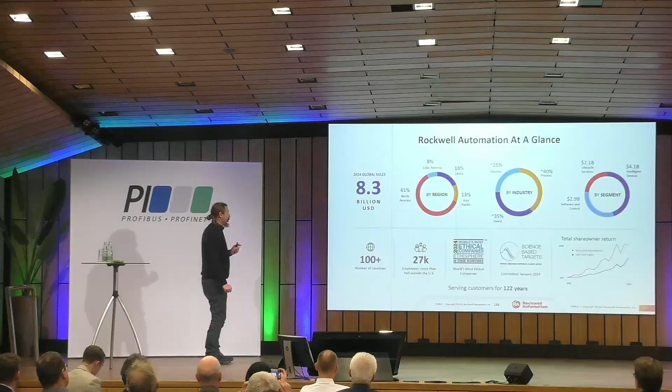This is the agenda for my presentation. I'll try to keep it as short as possible. Let's start by giving some information about Rockwell Automation. We are an $8 billion company. We are present more or less everywhere in the world. Of course, our home garden is North America, where we lead the market.

Okay, we are a successful startup. We started in 1903, and I can say we made it. So my message to the startup guys here is go on. Maybe you will find a company that will last more than 100 years like Rockwell Automation. We started in 1903 with nothing to do with industrial automation. It came step by step. I'd like to mention a couple of important dates.

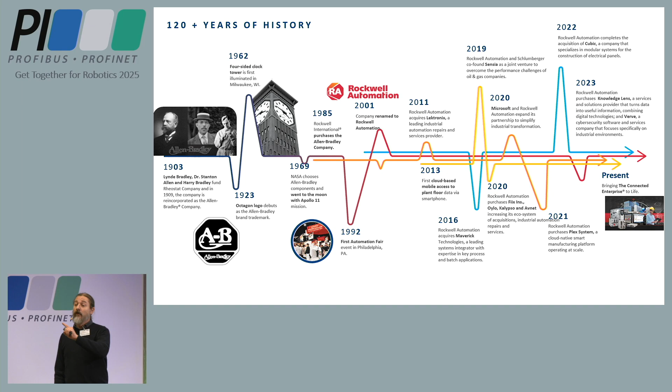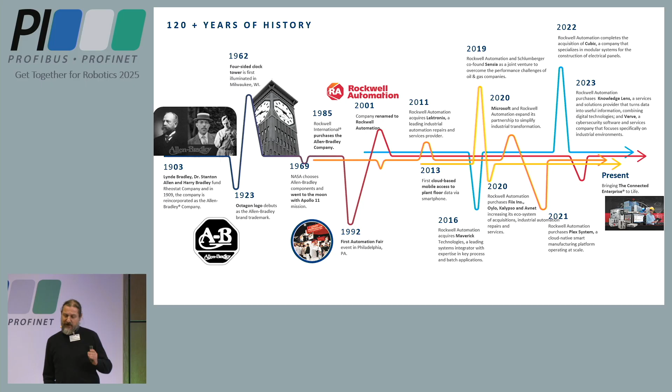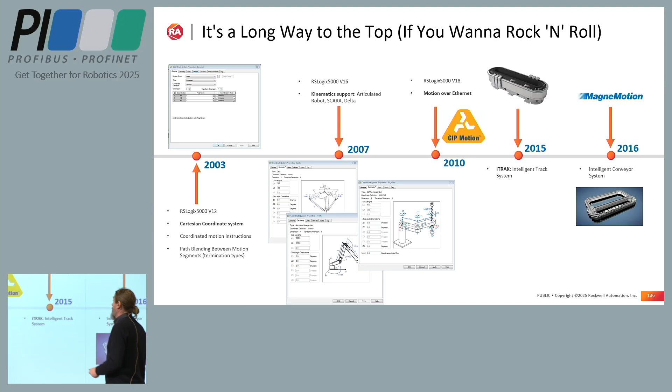Okay, let's have a quick look at the past, talking about integration of robotics or coordinate systems or multi-axis systems, let's call it as you want. We started in 2003 with the first coordinate system, so the capability of grouping axes together. Then kinematics followed, so that we could link different types of geometry to the multi-axis coordinate system.

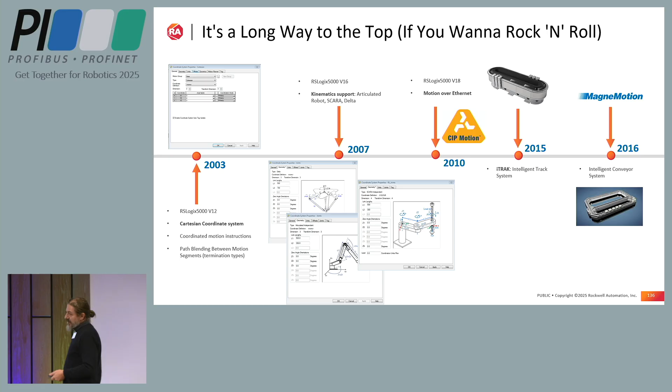In 2010, we introduced motion over Ethernet. Before we had analog cards and then SERCOS, and then in 2010 we moved to the ODVA Ethernet technology. I'm also naming the independent cart technology because it will come back later in the presentation, even though it's not related to robotics, but they share common ground.

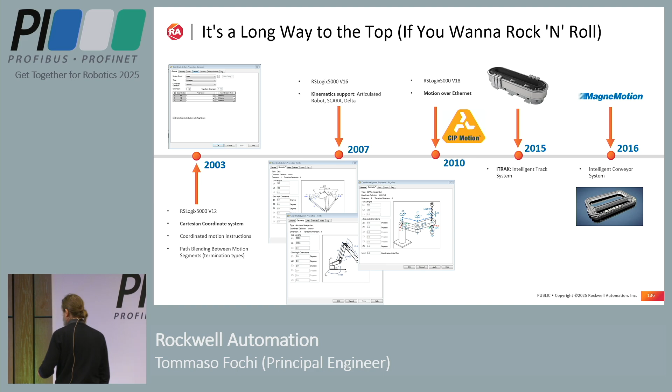So in 2015, we introduced the iTRAK, and in 2016 we bought MagneMotion, a Boston-based company that still makes intelligent conveyor systems. In 2018, we introduced the Application Code Manager, our tool to store or generate libraries, which we'll see come back later in the presentation. In 2019, we announced our offering of kinematics, getting up to 6-axis linear interpolation.

In 2019, we acquired Emulate 3D, a digital simulation software. We'll come back to that later in the presentation. In 2022, we introduced the first release of the robot libraries, which we're going to talk about quickly. And in 2023, we acquired ClearPath, a manufacturer of AMRs. So this is the latest addition to our portfolio.

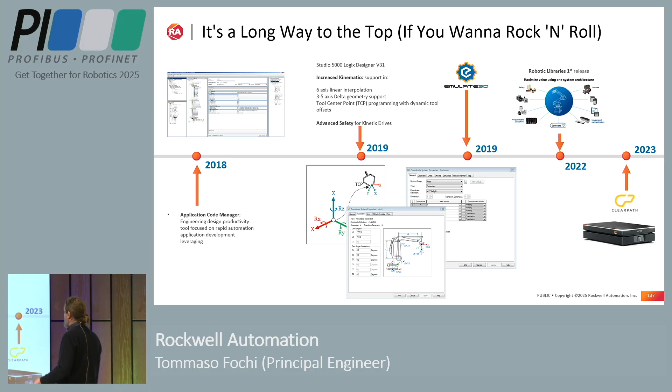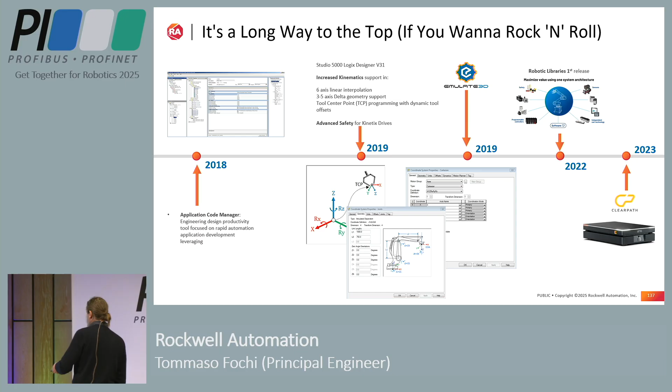We are not a robot manufacturer, so we don't manufacture any robotic arm, but we try to give our customers the capabilities of driving robotic arms, whether they are industrial models or homemade, because we have customers that just build their own kinematics that fit their needs.

The next chapter is simplifying customer experience and unlocking value with digital tools. This is a copy from a marketing presentation, but don't worry, I'm not going to kill you with marketing stuff. I want to talk a little bit about the state of the art today, and how we try to help our customers and make their life easier through hardware and software convergence. I'm not sure that's the right name, but I think it describes well the fact that the real world, control world, and simulation world are more and more connected, and how valuable this integration is to deploy more robust projects, faster, and more generally to give benefits to a user, creating more advanced, efficient systems and improved functionality.

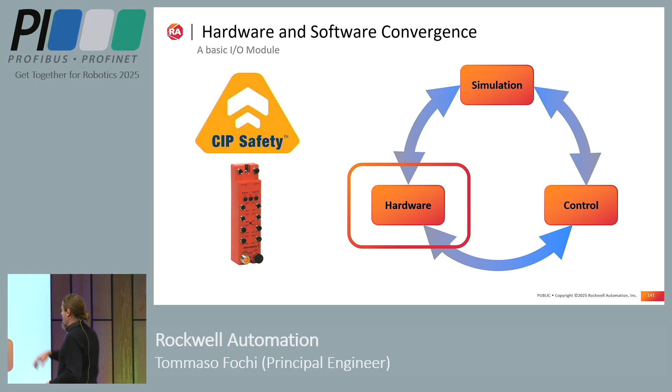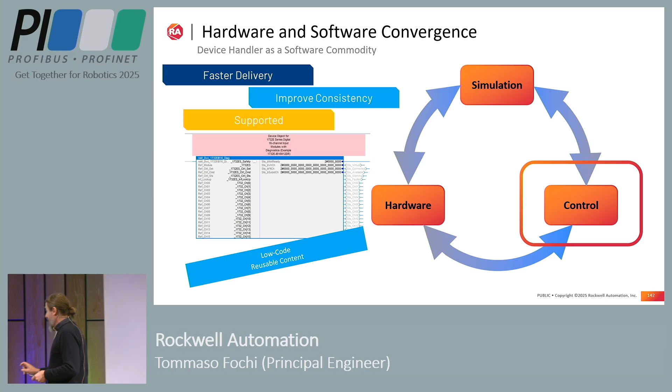What else? So let's start from the beginning. Let's take a simple I/O module, nothing special, 8 safety I/O that runs on a safety network. That's the hardware part, and we provide a software object that is related to the hardware module. So it includes all the functionality of the module, and it's also ready to get connected to the digital twin of it. So you have the hardware component, the control component, and the simulation component. They can run together, or you can have your control connected to the simulation. You can even have an emulation of the control. So possibly you can design and test an automation environment with no other tool than your PC. So you can stay at home, drink a coffee, and program a machine.

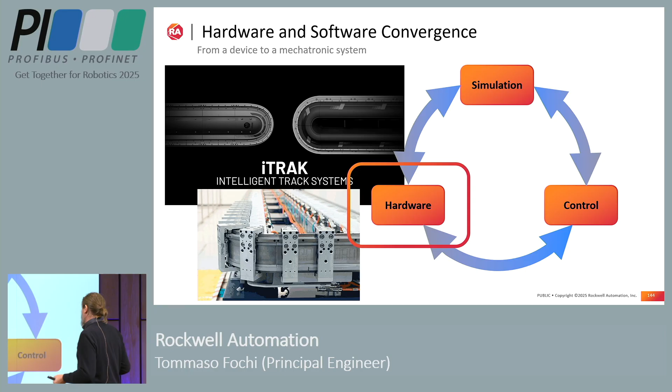Let's go to a more complex system. From a single device, we move to a mechatronic system. In this case, I took the example of an iTRAK. An iTRAK is a mechatronic system, it's modular, you can add pieces. You have some limitation in the shape that you can build, but in general you have certain flexibility, you can have different numbers of movers, so let's say it's a system.

Just like the device that we talked about before, there's a control object that you can grab from the library tool that we just introduced before. And this object, I wrote low-code reusable object because it's already there. You just need to grab it and put it in your code.

Configuring it and not programming it. So we are going in the direction of less programming and more configuration. You configure your system and you deploy the control content into your application, and it brings with it all the subsystems that are managed by the main device handler. So the device handler then manages the other subsystems that belong to the mechatronic system itself, just by grabbing it and putting it into your code.

And of course, it comes with a simulation twin. So you can build your iTRAK using standard reusable components. So now we are talking about objects that are ready to go. You just pick them, put them together, and you are ready to go. So you can use your control with the hardware, you can use your control with the simulation, you can use your control with both. You can virtualize a part of the machine so that some parts move physically, others move virtually, and you can do also the other way around.

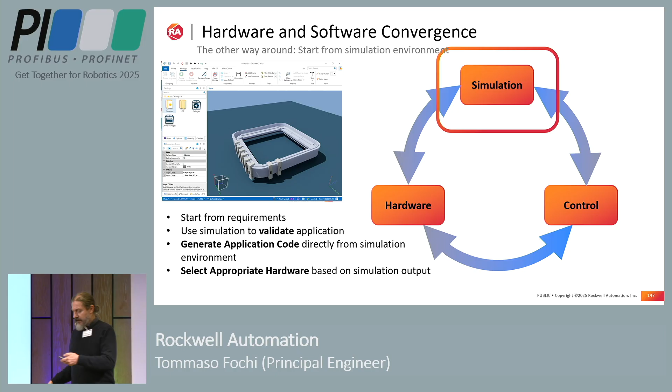Now we move to robot, which is, let's say, the topic of this meeting. And you will see how the concept stays very similar. We have two paths to getting more from your robots. Unified robot control, that means the robot is controlled directly by the Rockwell PLC. It's fun to call it a PLC because automation controllers today are much more than what a programmable logic controller used to be. We also try to give it a different name.

So instead of calling it PLC, we try to call it PAC for a while - programmable automation controller. But this PLC name is in everybody's head, and it stays there. Not a problem. So you can control a robot directly from the system, or you can have what we call Ethernet/IP connected, so drive a robot through the network. Profibus is a great network, but Ethernet/IP is not bad as well.

And let's say, because we are involved in the network connection of industrial robots, of course we are interested in SRCI. So we are joining the working group, and we will participate where we can in the definition and development of the next phases of the SRCI.

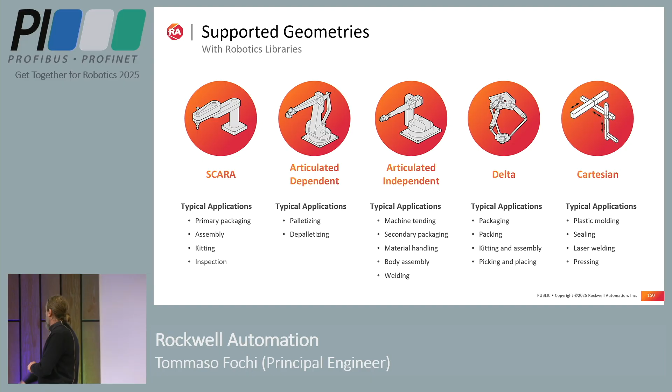These are the supported geometries - I will not bother you with this. These are, let's say, our official partner networks. Some of them provide mechanics that goes directly controlled by the PLC. Others are partners that we can connect through network.

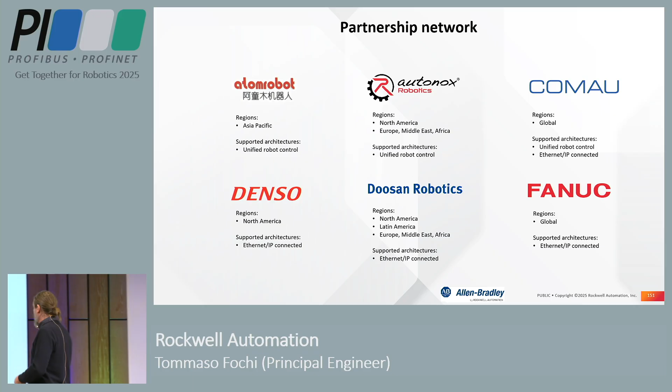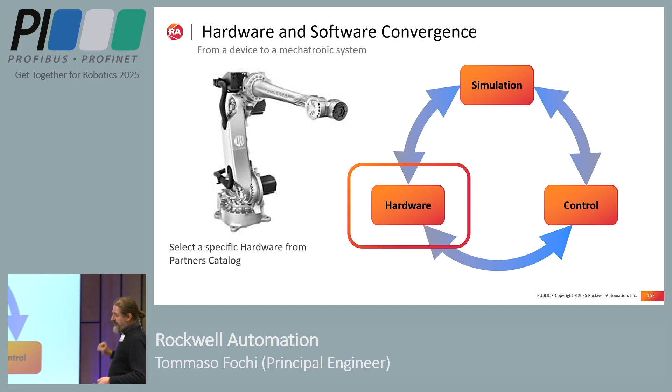But let's go on, and we return to what we were discussing a few slides before. So what is a robot? The robot is a mechatronic system, again. And in particular, for this type of application, we have a partnership with Comau. So you can select a specific hardware from the platform, from the partner catalog. And guess what? You have the corresponding device handler that you grab from the library.

Again, configuration and not programming. You just need to tell what type of robot it is. In case of a partner robot, it brings along everything. So it knows the dimensions, it knows the physical properties, it knows the motors, everything. So you take your robot module, you put it into the controller, it brings along all the subsystems, so you don't have to worry about drives, configuration, motors, because they all come with the robot module.

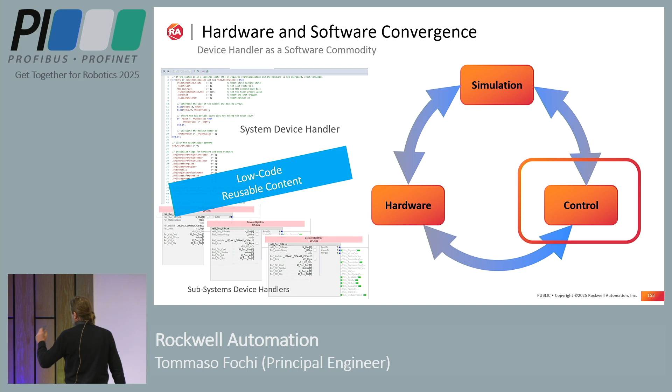And of course, you can link it to the simulation environment, again using standard, ready-to-go, reusable components. So let's say you can really start building your application without writing a line of code so far. Of course, at a certain point, you will be required to write some code. But so far, you have done nothing but specifying a catalog number, specifying the configuration of your track or whatever it is, and boom, everything is generated and fully working. And of course, also here, you can do the opposite.

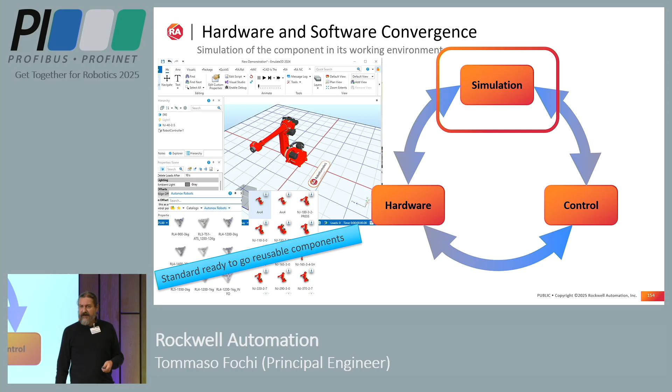So you can start working in the simulation environment and, using the libraries that lie behind, generate your control device that is ready to be downloaded to the PLC. And of course, you can put all these things together. So you can have a robot working with a track that receives inputs from a module, and you take all these modules, put them together, and build the infrastructure of your code just by grabbing devices from the library.

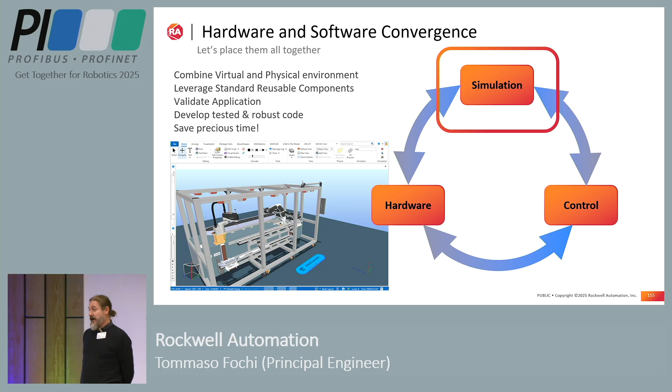You can combine virtual and physical environments. You can leverage standard reusable components. You can validate applications in a simulation environment. You can develop and test code in a more robust way. And in the end, you can save precious time. This is not always understood, especially by smaller OEMs, who are always in a hurry. They are always late with their project, and sometimes they think that sitting at a desk playing with a simulation environment may be a waste of time. You should be on the machine making it run. But the reality is that the work you do in the simulation environment will be precious later on.

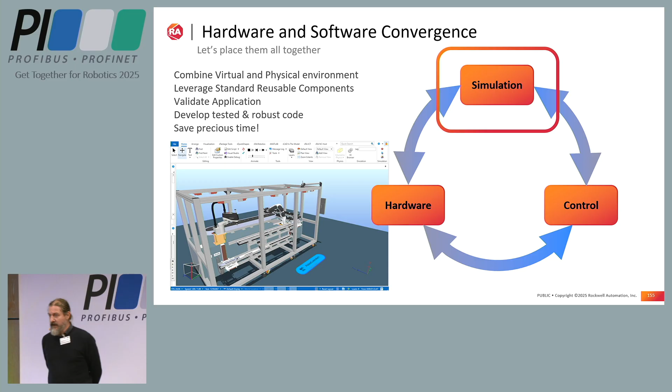Not just in the commissioning phase, it can also be used in post-sales applications. If any customer reports an issue or a problem, you can help troubleshoot simply using the virtual system. If the machine isn't completely built, you can virtualize part of it and keep the other part real. So there's a number of possibilities that the new digital tools, which I believe every PLC vendor today is offering to their customers, give you to work better, save time, and make more robust projects. Done.

Thank you. Finito, finito. You did it in half. I can get a beer now. A Negroni, maybe. No, it's not the right time.

So you did that in half the amount of words that Maurizio used, because he said 'that's it,' and you just said 'done.' Okay, wow. By the way, who did your marketing slides, the fancy ones? Was it you? Was it Roberta? Yeah, it was a collaboration between me and Roberta. We noticed the AC/DC reference. Oh yes, because I love rock and roll, among the many things that I love. I thought you were going to add something like 'for those about to rock, well...' Right, I thought 'hard as a rock, well...' You missed an opportunity. You're totally right, I thought about adding additional references, but I wanted to give a serious impression, and not just let you know how full of it I am immediately.

That's fair enough. Do we have any questions in the audience for Tommaso? You've overwhelmed them. Good. Yes, I knew it. Thank you, Bertus. You we trust. Please, go ahead, but he's a friend, so...